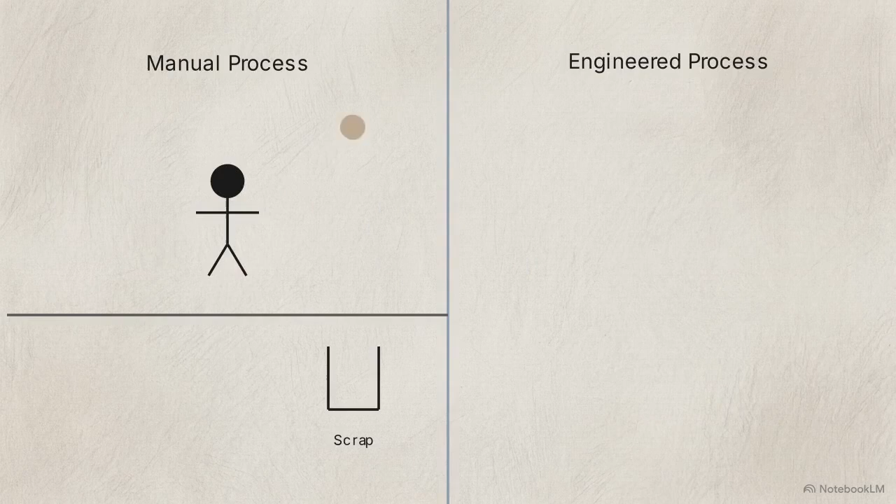When you look at any complex operation, whether it is a manufacturing plant, a hospital, or a logistics network, you will find an unavoidable variable: human attention. On the left side of this model, we see a system that relies entirely on an operator performing flawlessly, which inevitably yields high defect rates and material scrap.

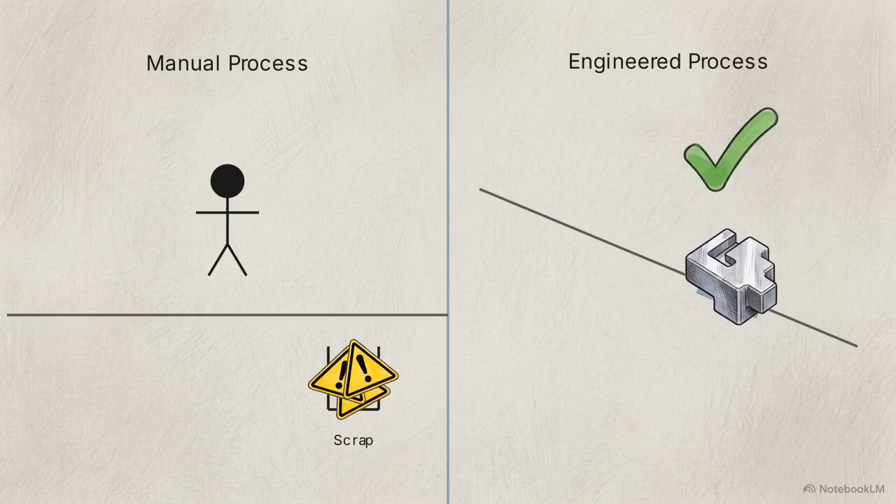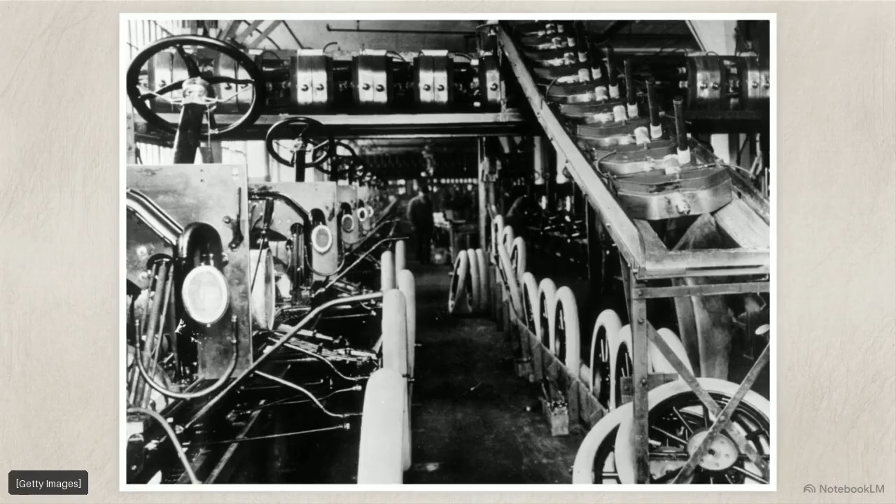On the right, we have a system where the physical components lock together in a way that mathematically prevents incorrect assembly. A single lapse in attention on the assembly line does not stay localized. If an improperly fastened component moves to the next station, the cost to fix it multiplies. By the time that localized error reaches the final consumer, it results in massive systemic losses through warranty claims, physical waste, and consumed capital.

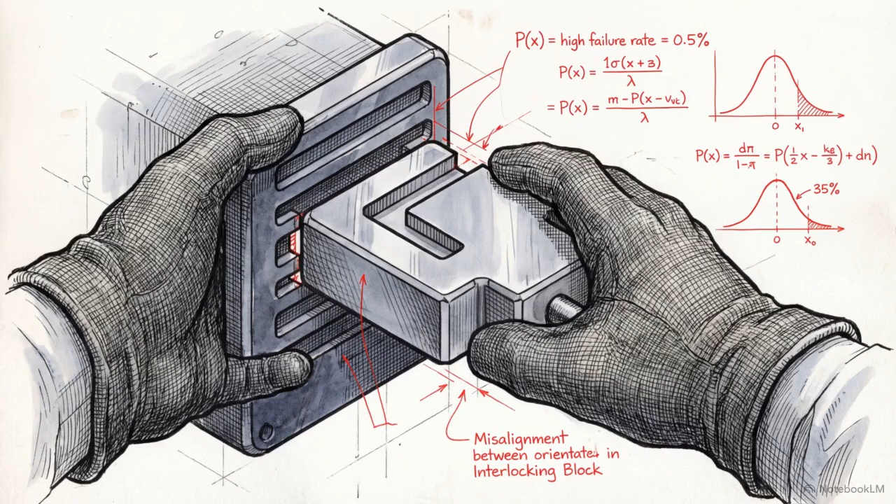Early industrial systems operated entirely on the assumption that workers could maintain perfect focus. Production lines relied almost completely on human perfection to maintain quality control, with operators manually verifying every step. As production scales into the millions of units, requiring absolute human infallibility becomes a statistical impossibility. The mathematics of probability guarantee that an operator will eventually misread a dial, skip a step, or install a part backwards.

High-reliability organizations recognize this math. They do not achieve quality by posting warning signs or demanding that their humans try harder. They achieve it by engineering the vulnerability out of the system entirely.

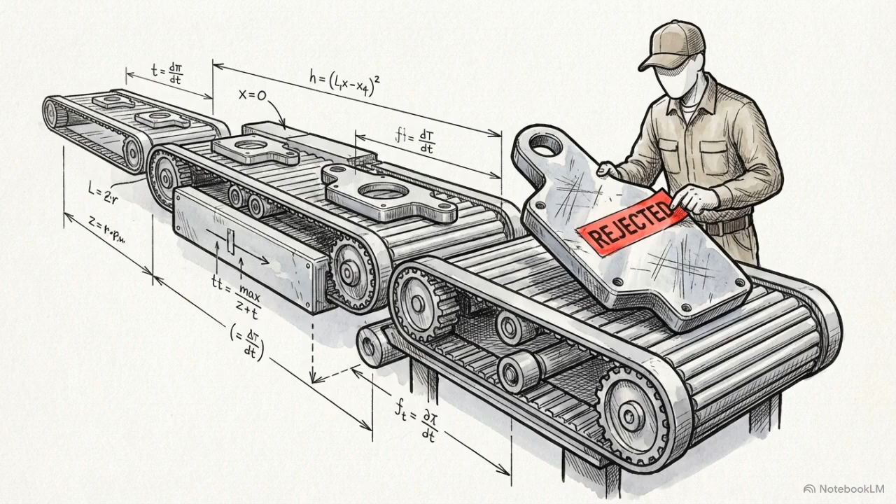Modern quality management requires a shift in how we view mistakes. Instead of building reactive correction systems to catch errors after they occur, the goal is to build a preemptive architecture that physically intercepts the error before it can form.

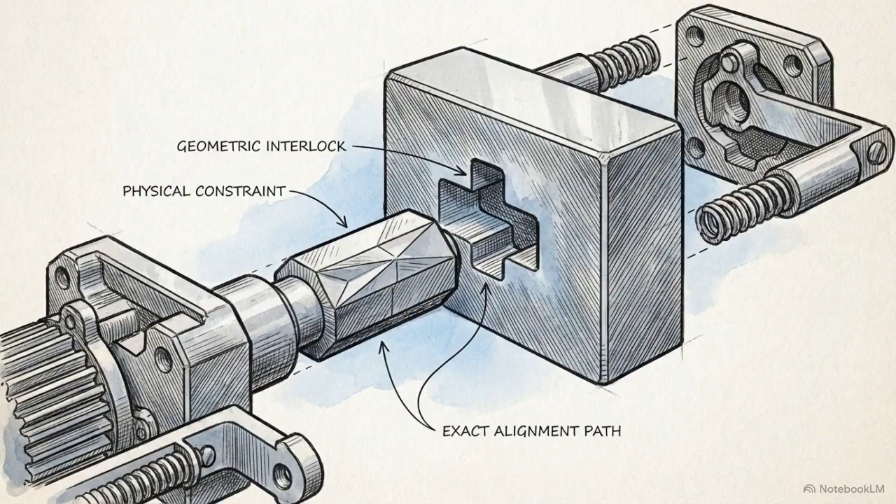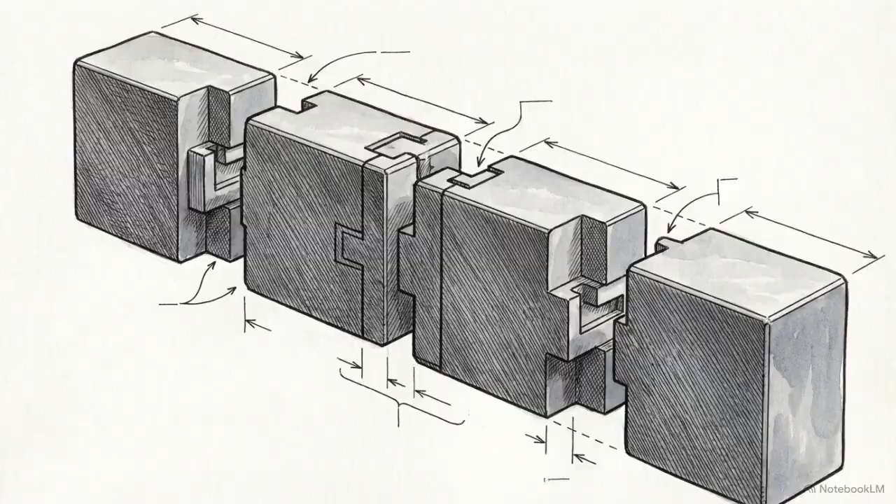The first conceptual layer of this architecture is mistake-proofing. This is a preventive framework designed to guide user behavior and minimize the probability of human error through clear instructions and standardized processes. The next structural escalation is foolproofing.

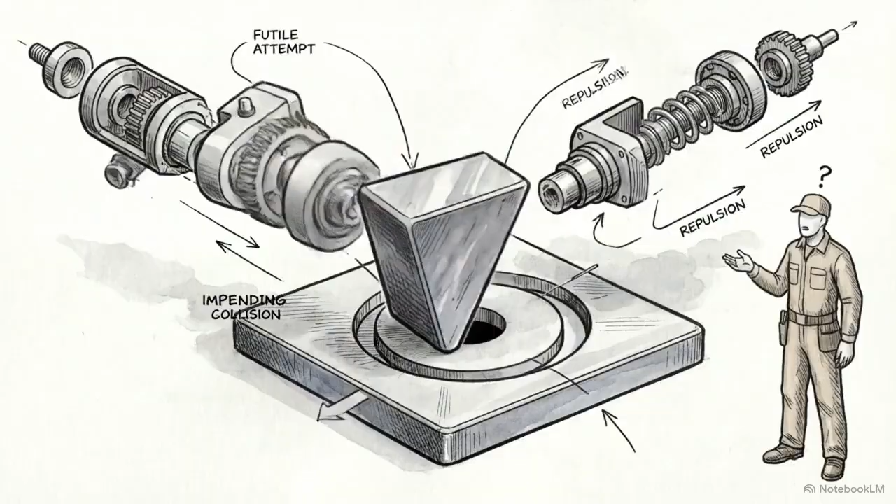Here, the design is altered so that making the error becomes physically impossible, taking the choice entirely out of the user's hands. On the factory floor, these concepts are operationalized through a specific Japanese methodology known as Poka Yoke, which translates directly to mistake avoidance.

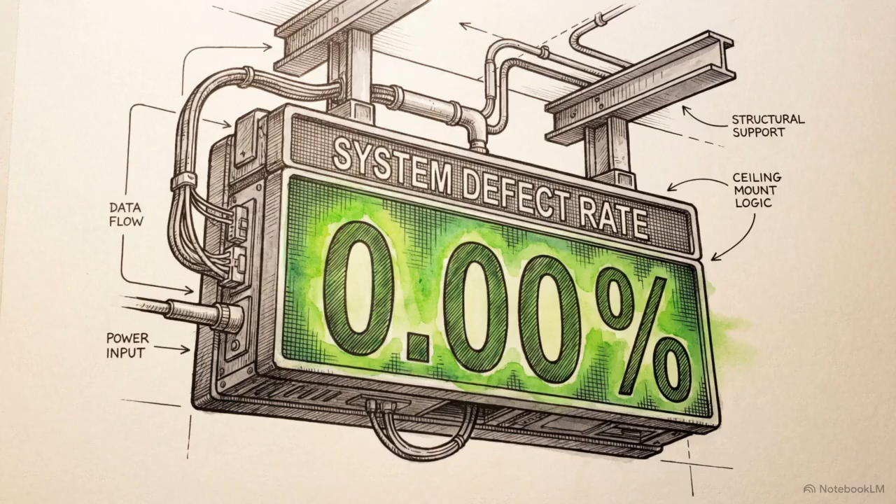Mastering mistake-proofing, foolproofing, and Poka Yoke provides the exact mechanical pathway an operation needs to transition from accepting a baseline failure rate to running a true zero-defect manufacturing environment.

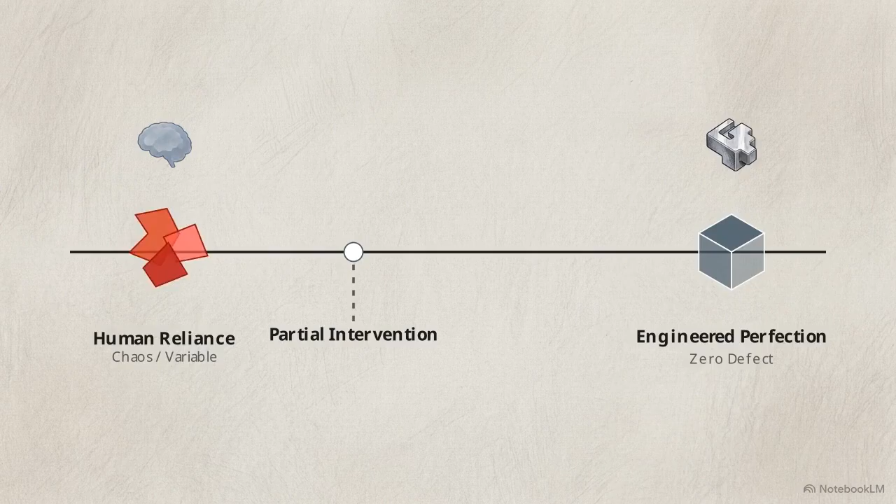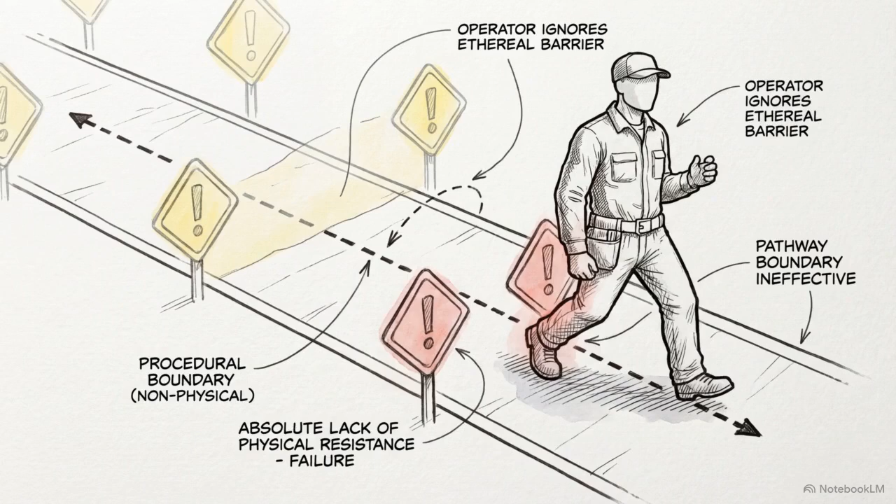System safety exists on a spectrum of control. You rarely jump straight to absolute perfection. You begin with partial interventions. Mistake-proofing sits on the partial end of this spectrum. It is a procedural approach that gently guides the user. It warns them, but it cannot physically stop a deliberate action or an act of severe negligence.

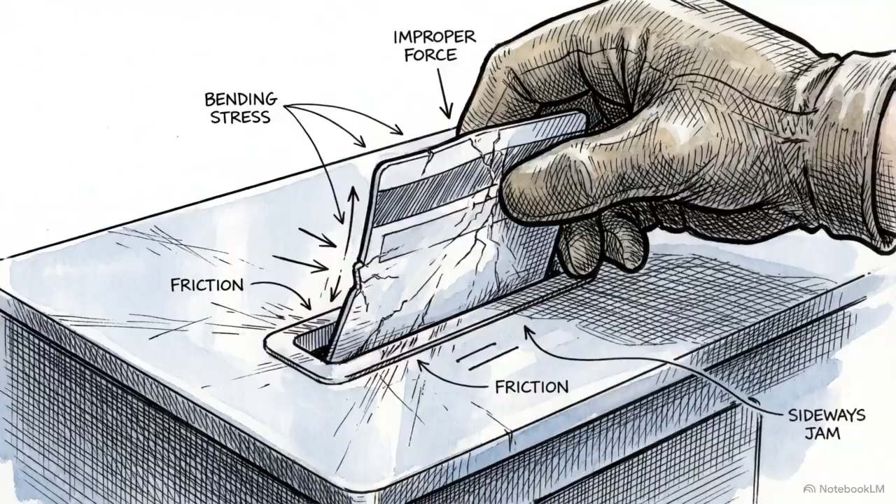We interact with this level of control every day. When an ATM dictates the specific direction you must insert your card, or when a computer system forces you to include a capital letter and a number in your password, you are experiencing procedural mistake-proofing. The limitation here is clear: these rules reduce the frequency of errors, but the architectural vulnerability remains intact. A user can still ignore the instructions and force the card in backwards.

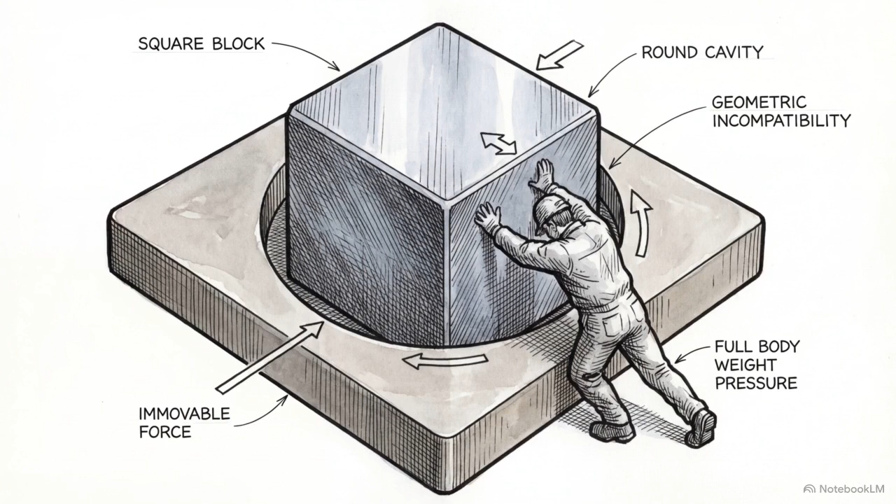Foolproofing corrects this by pursuing absolute control over the interaction. It operates at the fundamental design level. By engineering the exact geometry or logic of a system, foolproofing ensures the user cannot fail, regardless of their intent or behavior. Look at the interlock on a microwave oven. The machine is designed to mechanically sever its own power supply the moment the door is opened. You do not have to remember to turn it off. The physical barrier makes accidental exposure impossible.

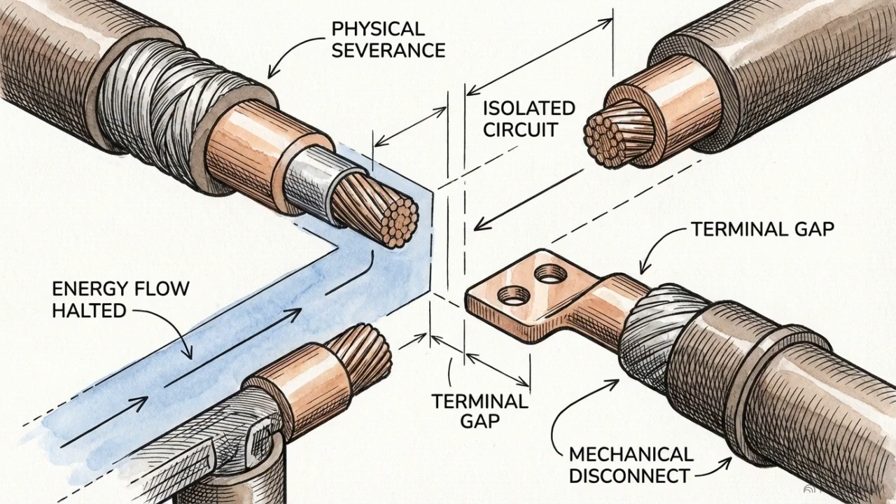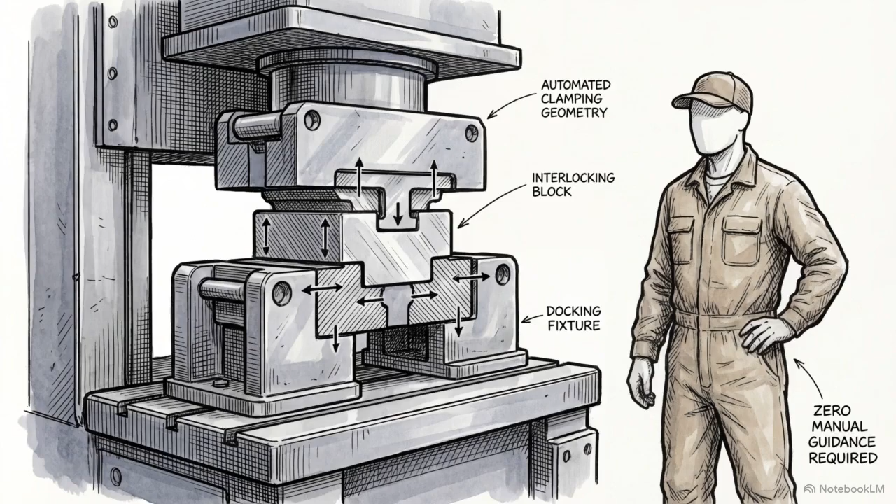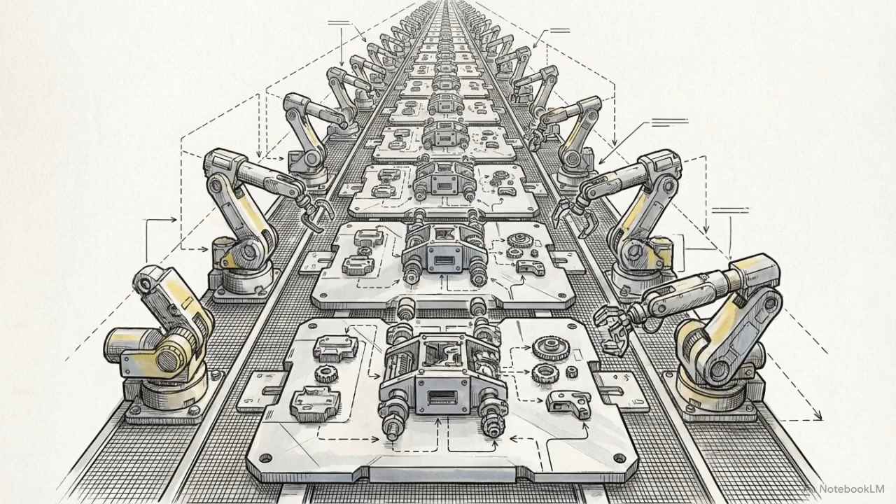To see how this theory functions under industrial stress, we look to Poka Yoke mechanisms on the active factory floor. A zero-defect environment is a minefield of safety mechanisms, categorized into 5 types of operational control. Station 1 represents the warning type. It relies on immediate sensory alerts, like flashing beacons, to notify an operator of an anomaly.

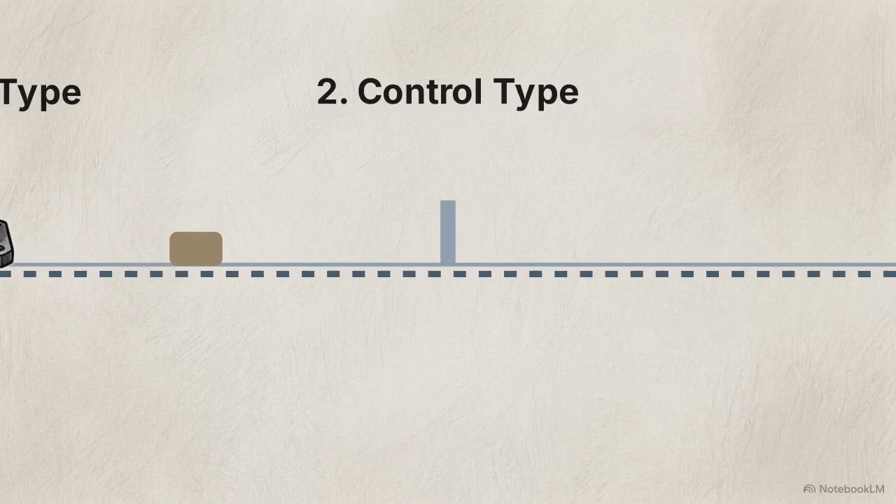Station 2 utilizes the control type. This aggressive intervention autonomously halts the conveyor line upon detecting a fault.

Station 3 demonstrates the contact method. By utilizing physical constraints or precisely cut jigs, the workstation blocks an incorrect part.

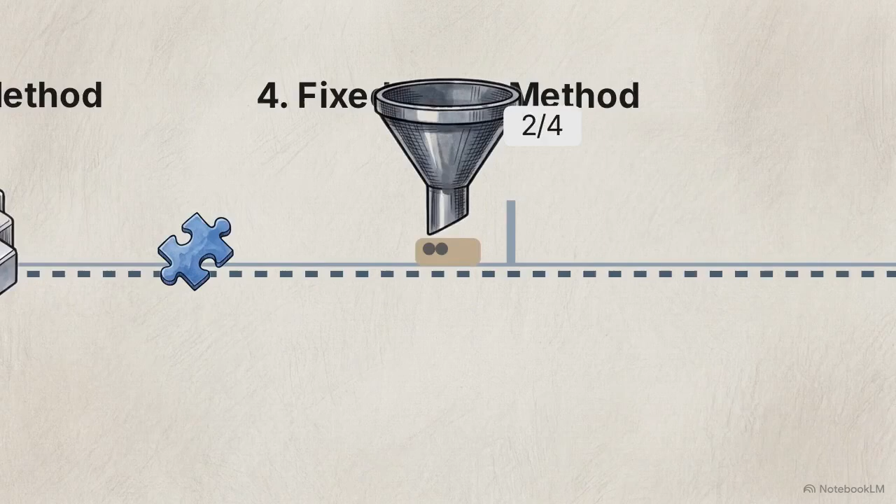Station 4 employs the fixed value method, enforcing strict quantitative control. A sensor verifies the exact number of screws dispensed.

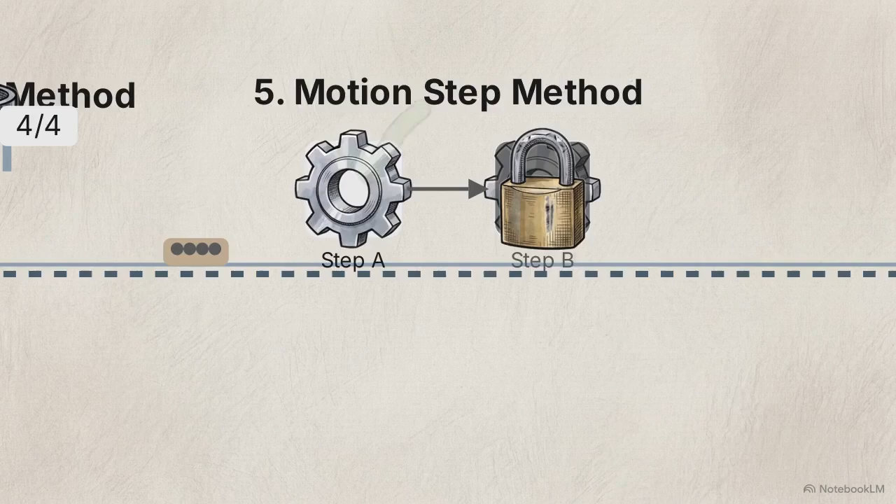Finally, Station 5 is the motion step method. It enforces sequential verification, physically blocking Step B until Step A validates.

These industrial mechanisms operate in our homes as well. The auto-ignition requirement on a modern gas stove forces you to press and hold the dial before turning it, a domestic application of the motion step method that prevents catastrophic gas leaks.

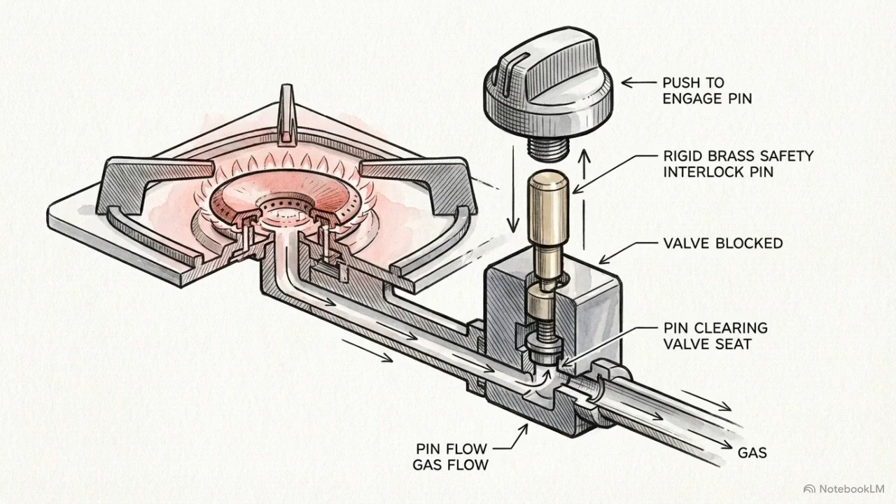By layering these 5 mechanisms together, engineers weave a localized web of infallibility around a single operator, covering sensory, mechanical, and sequential vulnerabilities. Achieving a 100% yield on a production line is not a matter of luck. It is the mathematical outcome of deploying the correct Poka Yoke taxonomy at the exact point of human vulnerability.

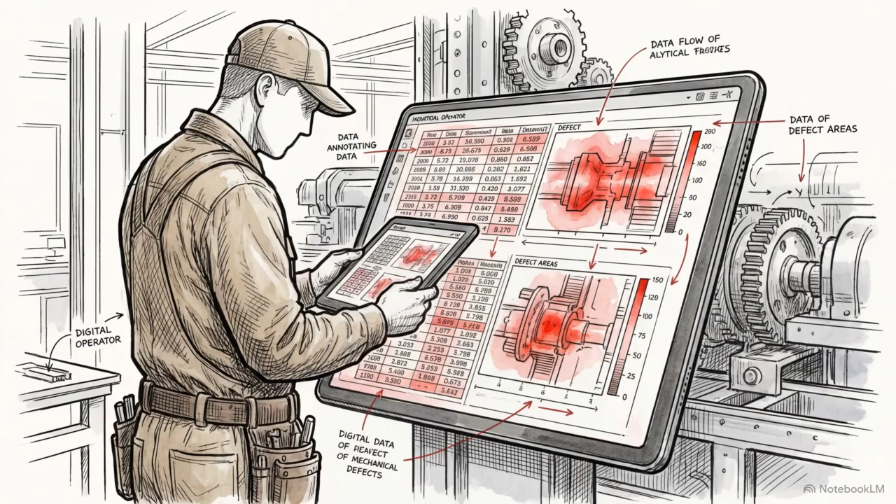Deploying these mechanisms requires an organization to follow a rigid 6-step engineering protocol, which begins with the meticulous collection and analysis of existing defect data.

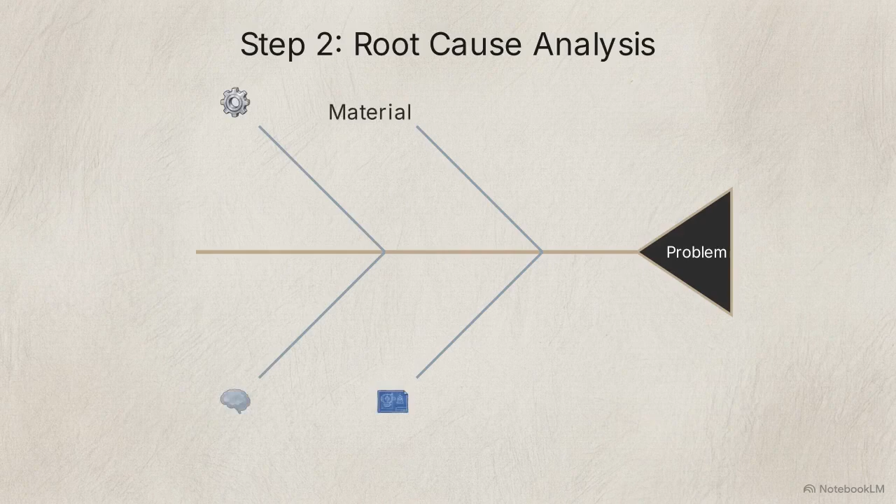Step 2 requires root cause analysis. You cannot engineer an effective constraint until you isolate the exact origin of the failure. Engineers map this using a fishbone diagram, separating variables like machinery, raw materials, and human methods.

Within that map, they apply the 5 whys technique, a recursive interrogative method used to strip away the surface symptoms until the base mechanical or logical flaw is exposed.

Steps 3 and 4 are solution design and tool selection. These are directly dictated by the root cause. If the flaw is geometric, the solution is a contact method jig. If the flaw is sequential, the solution is a motion step digital lock.

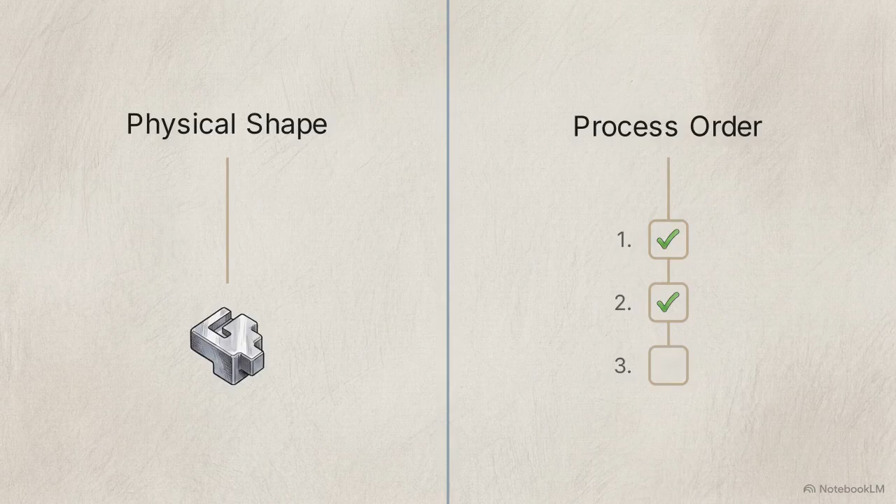The final steps are physical implementation and retraining. The workforce must be recalibrated to understand how to operate alongside the new constraints without trying to bypass them.

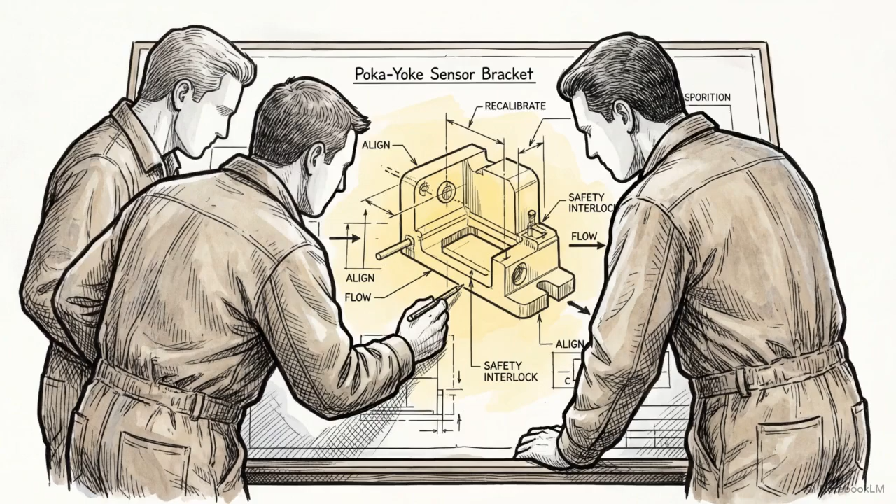Skipping root cause analysis to blindly install expensive sensors across a factory is merely treating the symptoms of a poorly designed architecture. An implemented solution remains a hypothesis until it is mathematically verified in a live production environment.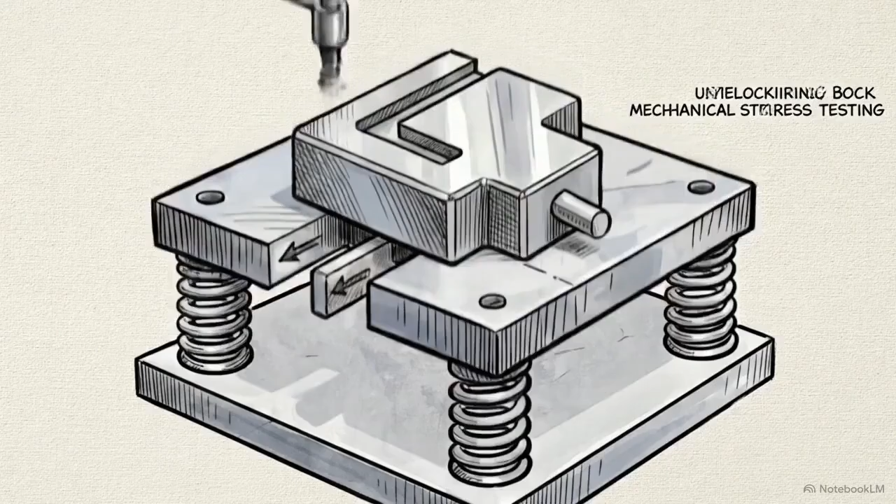Engineers subject the new mechanism to extreme stress testing, pushing the component to its operational limits to ensure the barrier holds up under sustained friction.

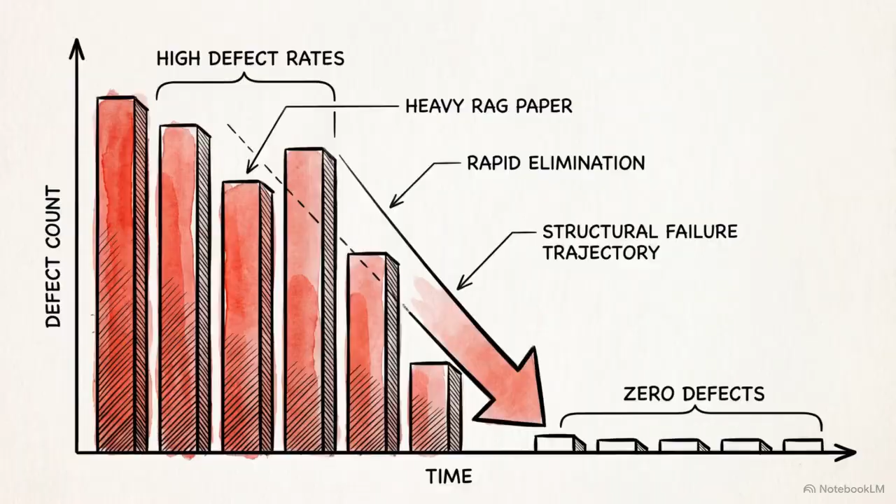Following the physical tests, continuous data analysis is required to track the trajectory of defect rates over time. The numbers must prove the intervention is working.

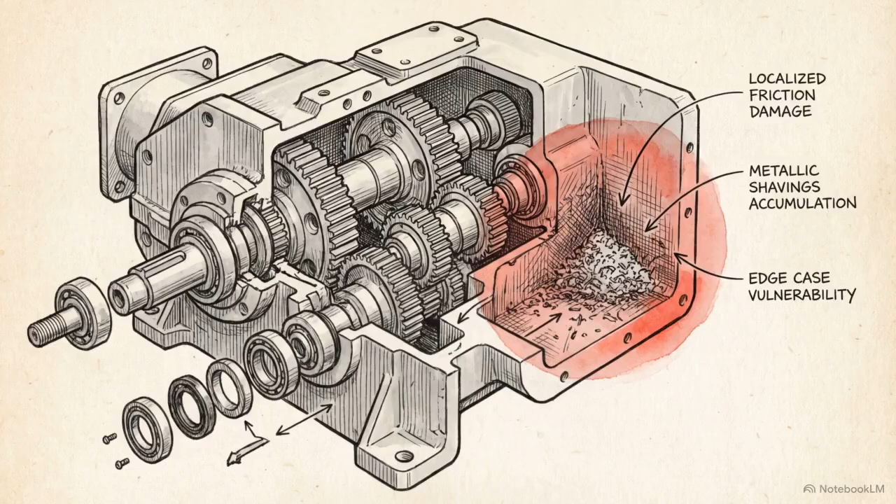This data is supplemented by routine physical audits and direct operator feedback, which highlight behavioral edge cases that the engineers failed to predict during the design phase.

Finally, the system's viability is judged against key performance indicators. Management tracks the ratio of quality improvements directly against the total capital cost of implementation and maintenance.

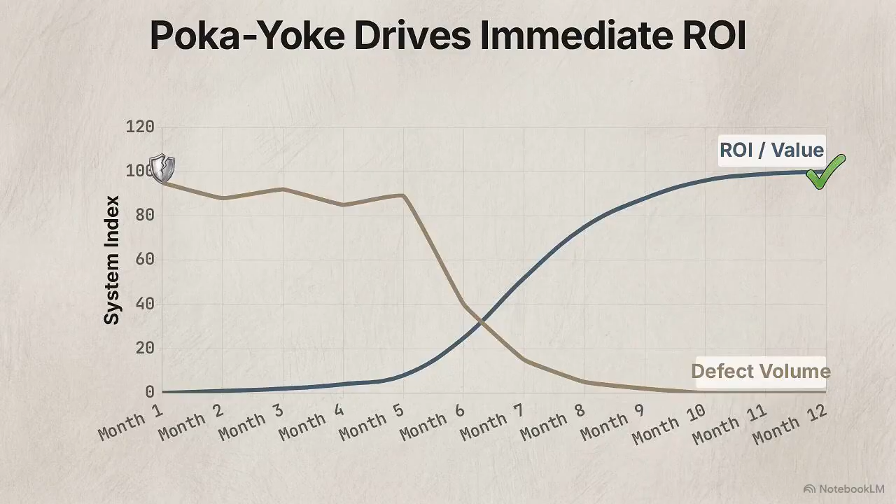This closed-loop verification process proves the return on investment. It directly translates prevented errors into saved capital and preserved resources.

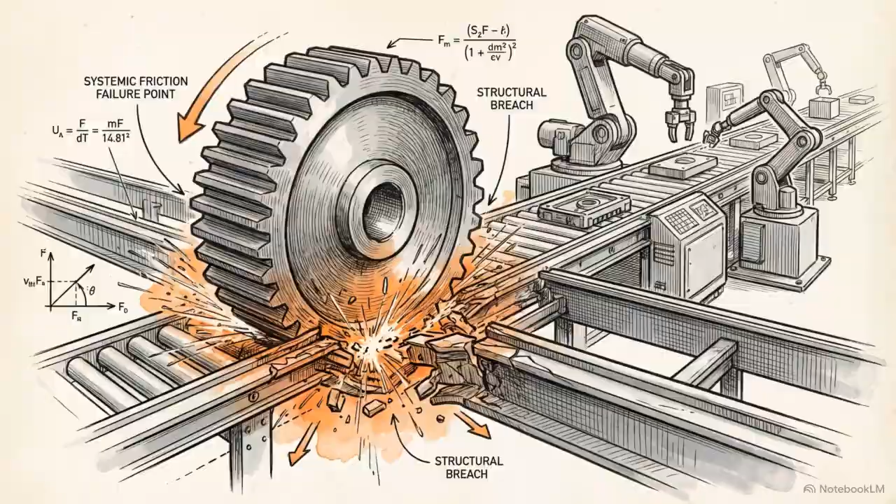Achieving structural infallibility introduces significant new frictions into an organization. The transition to absolute control is rarely smooth. It requires steep upfront capital costs and intense technical complexity to integrate advanced sensor networks into legacy machinery.

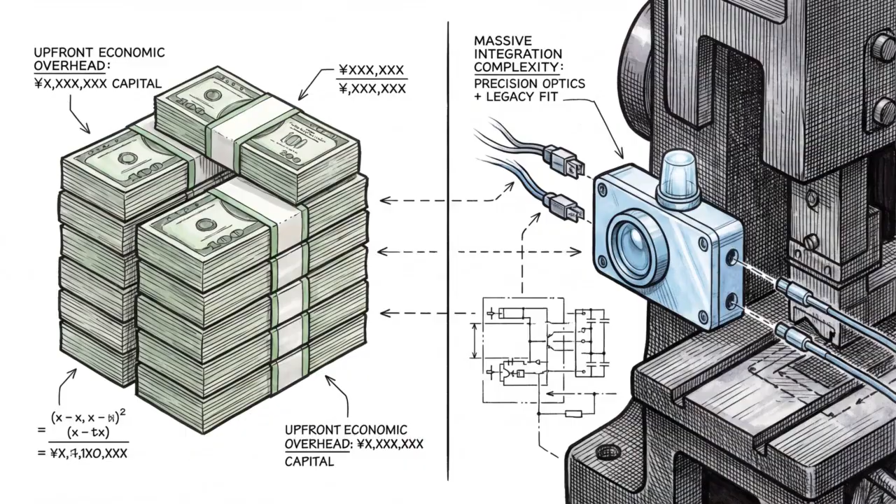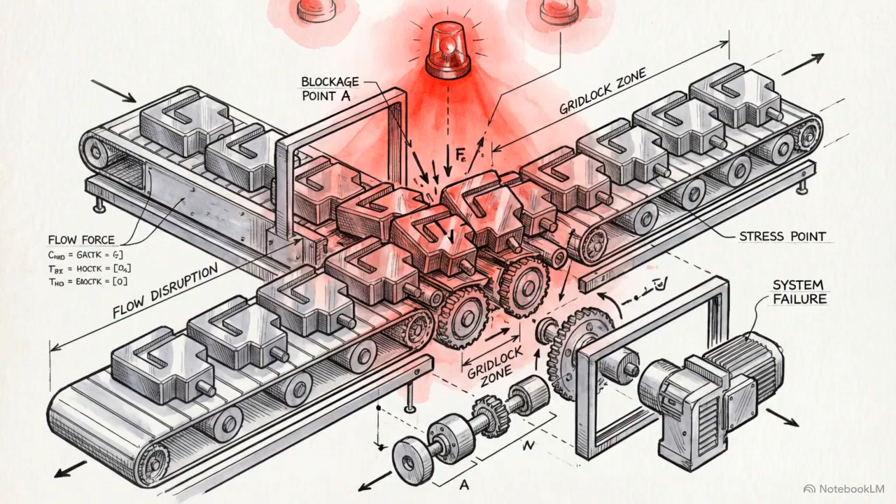On the floor, it can trigger resistance. Operators often view rigid physical constraints and forced sequences as a lack of trust in their skill, leading to hesitation and workflow disruption. There is also the ongoing burden of mandatory maintenance.

If a delicate Poka Yoke sensor breaks down or miscalibrates, the control-type mechanism will halt the entire production line unnecessarily, costing thousands of dollars a minute.

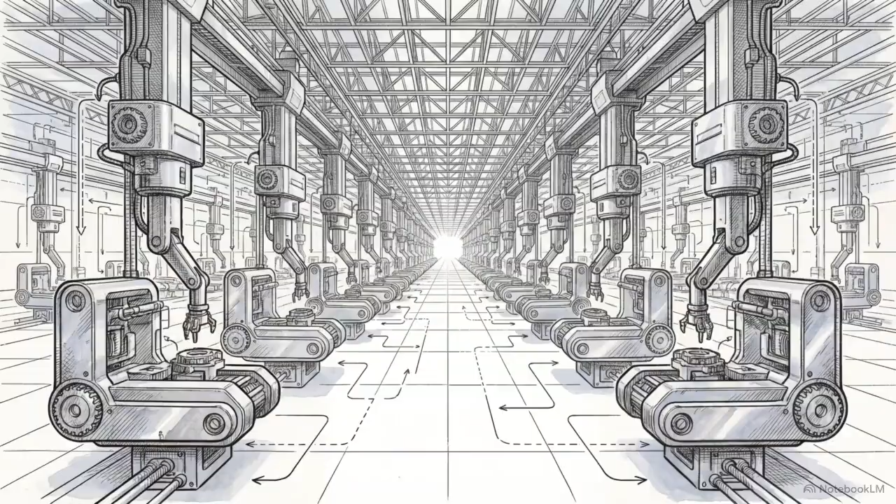These challenges are the necessary operational overhead required to sustain a world-class standard. They are the price of precision.

When fully integrated, chaotic production snaps into order. Physical constraints lock the workflow in perfect alignment. Downstream, rework disappears, warranty claims plummet, and defect rates drive steadily towards zero, resulting in a surge of client trust.

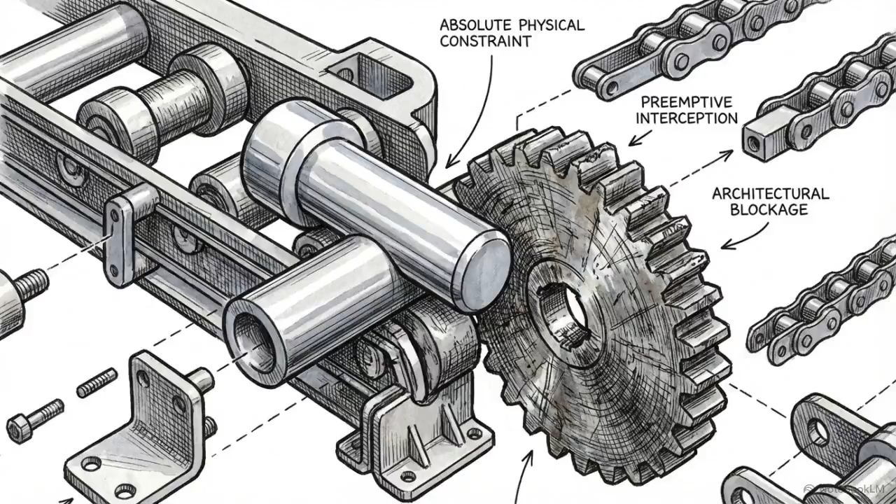It is vastly superior, in both economics and engineering, to stop a mistake before it happens than to repair the damage afterward. Mistake-proofing, foolproofing, and Poka Yoke represent a shift in how we build the modern world.

They prove that operational excellence is not achieved by hoping people do not make mistakes. It is achieved by building perfection into the architecture itself.